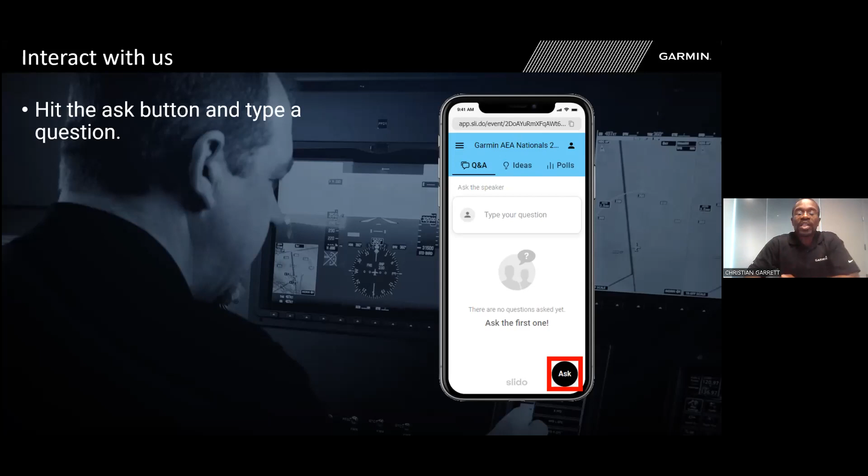So the interactive interface looks like this, and this will be a complement along with the PowerPoint that we're doing. You see, you can type your question in there on the screen, and then right there, what we see is a red lasso, more or less. Go ahead and hit ask, type in your question, and it gets submitted. You then have a secondary option of either allowing yourself to be named or to ask your question anonymously. Some questions you may not want everyone to know who you are, and that's fine. But again, if it's a question that requires follow-up, I will have to have your name in order to follow up with you.

Additionally, you see the stack that is up there in the top corner. Go ahead and press that stack, and that'll show you a number of the interactives, which are more or less the handouts that I have available for you. That's going to be a link to things like our Garmin YouTube page, which is a free way of getting information about Garmin products, as well as some free training. Also, we have links there for Fly Garmin for database questions, database management. We also have a link for the training classes that we have provided, and also some warranty information, among other things.

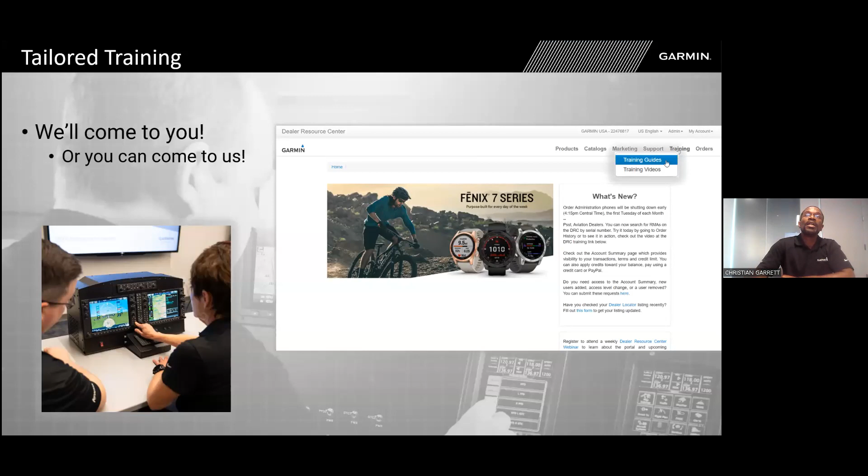And perhaps you also would like to pursue some of our interactive online training. Well, if that's you, you can go ahead and just click from our DRC the training tab at the top, click training guides, and then you'll see a page which appears like so on screen. Our example is coming from the 2022 dealer training catalog. We hit the download, and then something like so pops up.

This, of course, is our most recent dealer training catalog, and my colleague Jason is on screen actually doing maintenance and probably in the moment recording a training video. Our dealer training catalog does come out once a year, and you see right now we're covering from September 2023 until August 2024.

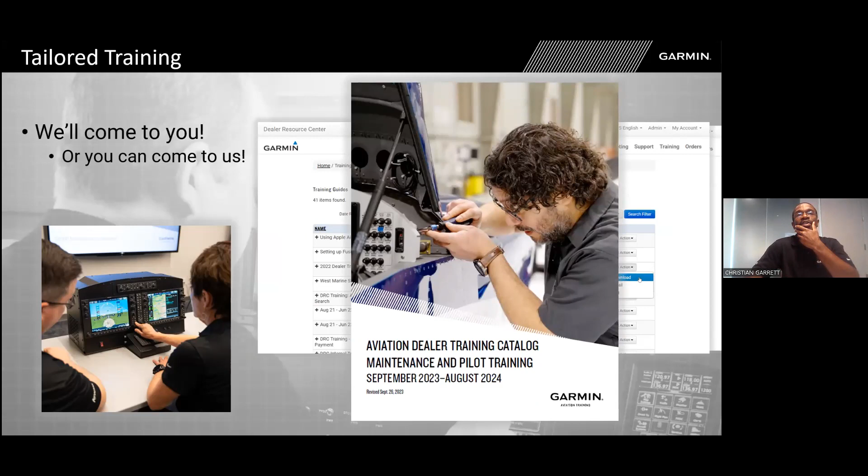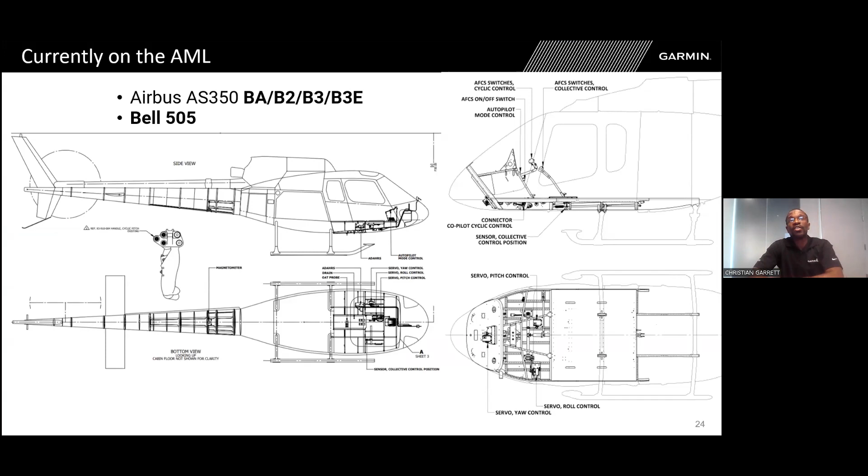And without further ado, let's march into the details of our Garmin Flight Controls 600 Hotel Part 27 interactive presentation. Currently on the AML for the GFC600H, we have the Airbus AS350, those varieties that you see on screen, and also the Bell 505. What you might not be familiar with is the acronym DHFCS. That stands for Digital Helicopter Flight Control. And this is going to be analogous to the AFCS that you're used to in the fixed wing variety.

This digital helicopter flight control is going to provide things like attitude hold, force feedback, and coupled flight director modes. It's also certified as a complement to the G500H, either the TXi or the original legacy, and also as a complement to the G1000H. What you would see on screen in the Garmin GDU is truncated over there on the far left. This is actually one full screen, but we've broken it down in our manuals to differentiate between the flight director command bars and the various HFCS annunciations that you would also see.

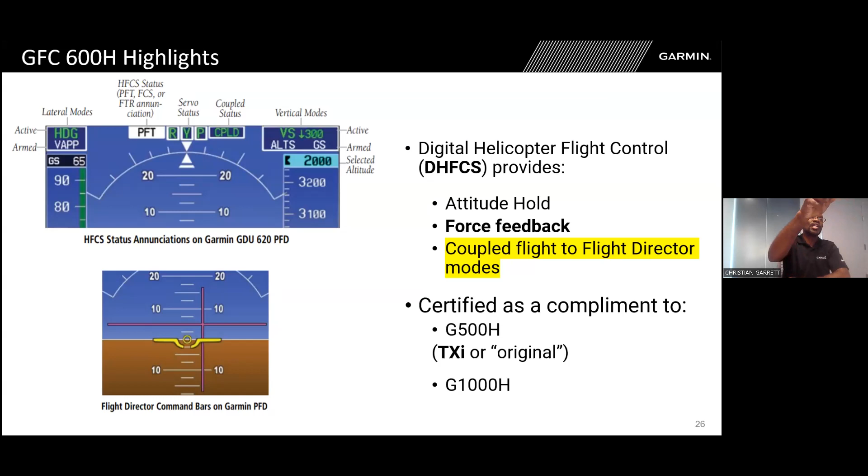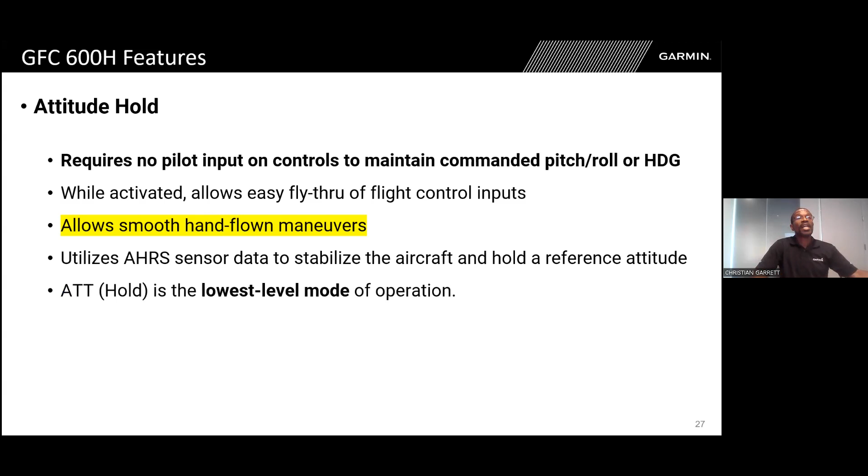Moving on to the other screen to talk a little bit more about attitude hold. This is the default base mode for the autopilot GFC600H. It requires no input from the pilot. It's an automatic default, and it's going to allow for assistance in pitch and roll, and alternatively also in heading. While activated, it's also going to provide those smooth hand-flown maneuvers. It utilizes attitude heading reference sensor data to stabilize the aircraft and hold a reference attitude.

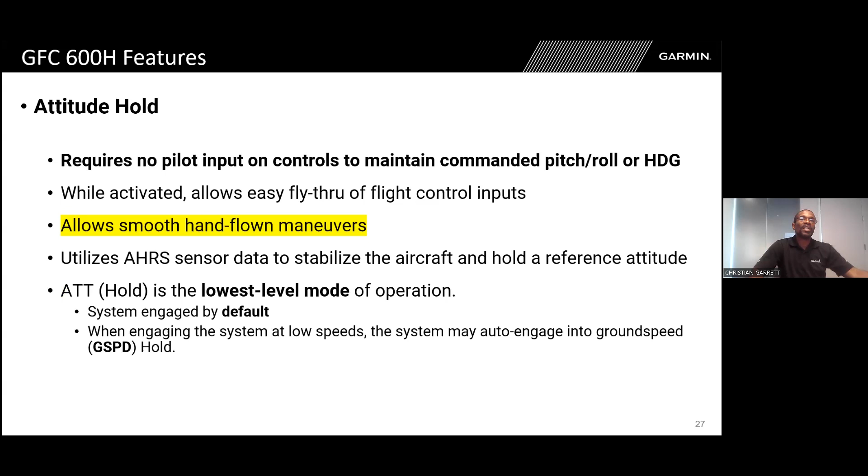It is, of course, what we call the base level mode, and above it are other modes that are not considered default, which we refer to as upper modes as far as this GFC autopilot goes. The system is engaged by default, but also depending on your speed, you may automatically be engaged into what we refer to as ground speed hold. Get ready, get ready, get ready. We have another Slido interactive.

I apologize, we do not. I don't see the laser? Oh, my apologies for that. Let me see. I believe that may be because of the Zoom interface. I'm going to go ahead and move on then.

Moving on to another subtopic, that being limit cueing, abbreviated as LMTQ. This is going to assist the pilot by giving tactile feedback. So this is the idea that if a pilot is flying, he or she would have tactile feedback in the cyclic to let him or her know that there's a danger of overflying the helicopter.

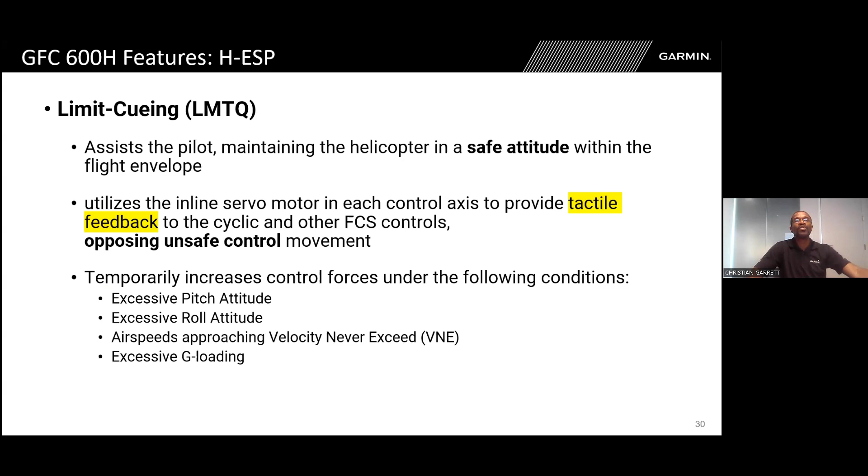This tactile feedback is going to be generated by the servos to give an opposing unsafe control response back to the pilot. This is going to be a guard against excessive pitch attitudes, excessive roll attitudes, approaching the velocity never to exceed, VNE, and also a guard against excessive G loading. It is active upon power up, but it can be disabled by holding down the flight controls disconnect switch for a period of 10 seconds.

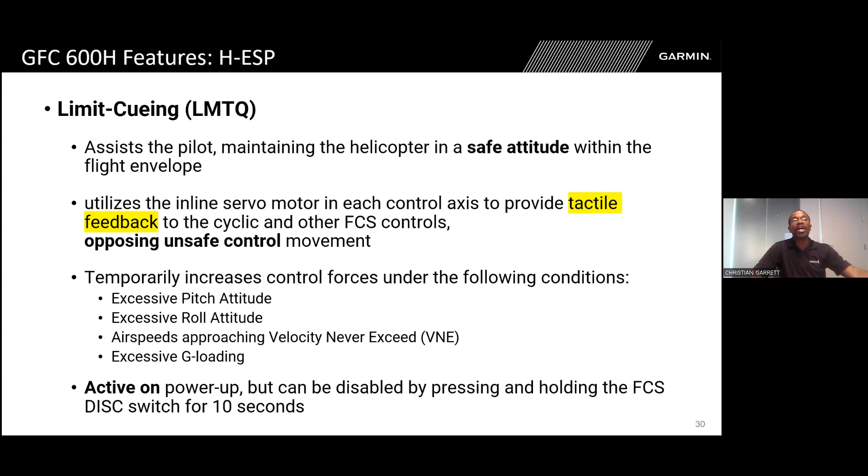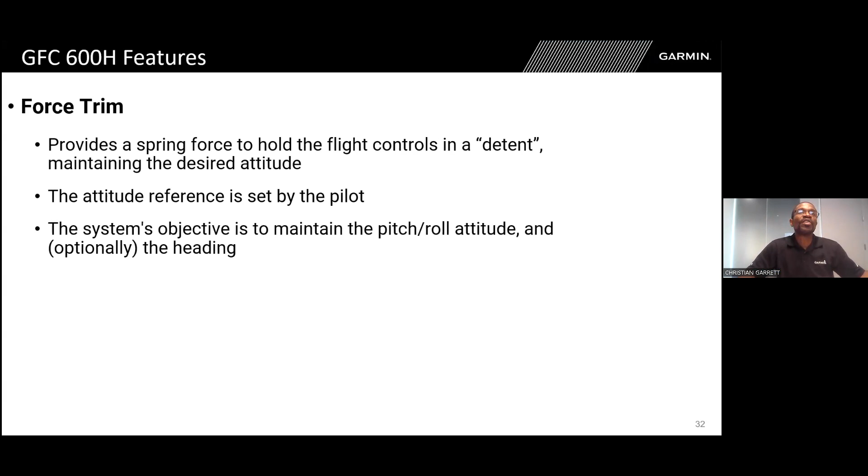Moving on now to talk about force trim. Force trim is basically a spring force detent that's going to hold those flight controls in a desired attitude. Think of this as being controlled to make sure that the helicopter doesn't bounce around needlessly. So this is a helping hand, more or less. But in the case of having a governing control to give a helping hand, it may be possible that the pilot may want to disengage just temporarily, or at least minimize the helping hand of force trim in order to do a maneuver. Can that be done, Mr. Christian?

Yes, it definitely can, with the force trim release FTR button, which is going to result in control forces being increased the farther the aircraft deviates from the reference attitude. So if you don't end up pressing down those force trim release buttons, the more you try to deviate from the detent in which force trim has placed you, you're going to get more limits on your control surfaces. But force trim release will allow you to temporarily disengage, or at least minimize, the governing control of the force trim helping hand.

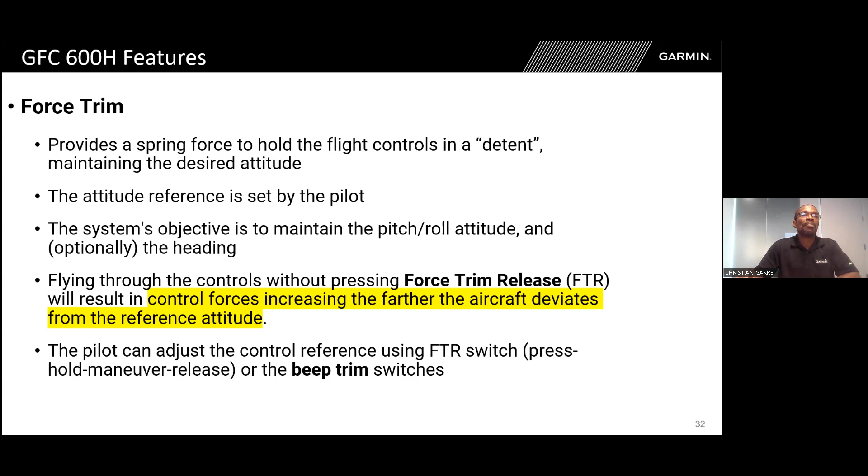Alternatively to the force trim release button, we also have buttons known as the beep trim switches, which can also provide that same temporary minimized disengagement. Moving on now to talk about speed protection. We talked about ground speed protection. Well, in addition to that, that speed protection has two varieties, that of max speed and also that of low speed, and additionally providing some low G protection available on the Bell 505 exclusively.

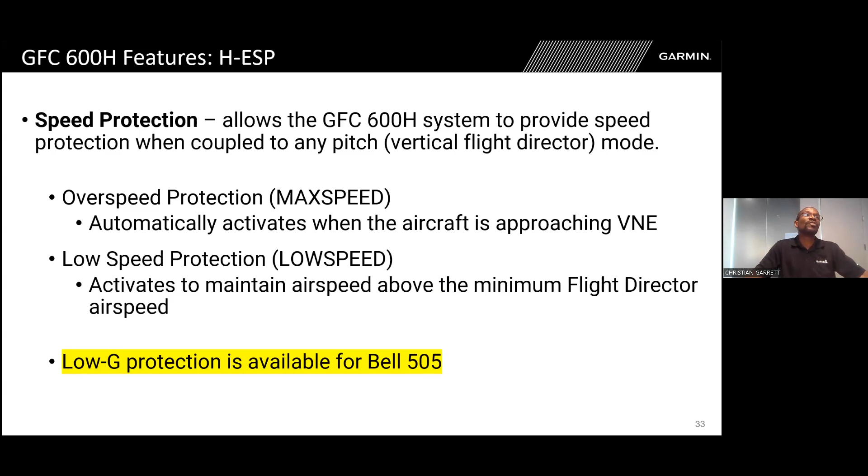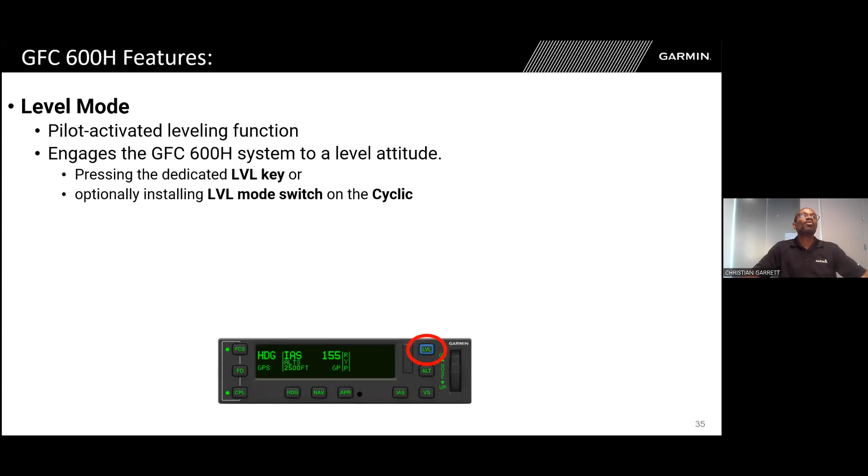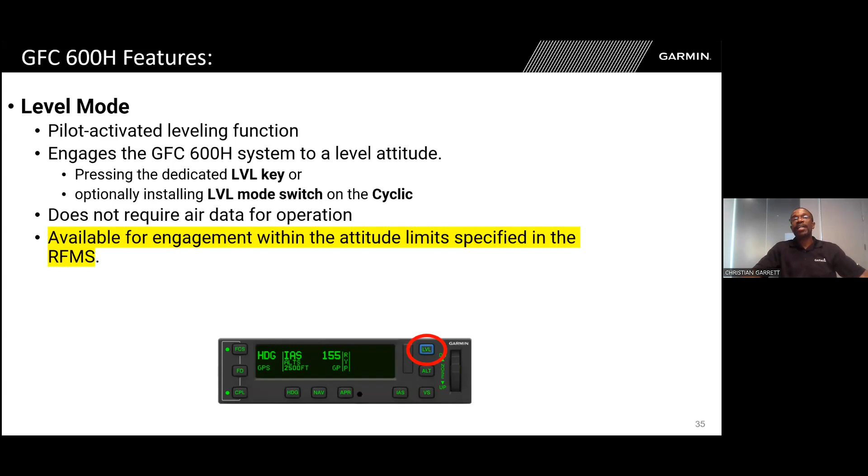Level mode. Now, this is one that I like because this is reminiscent of a disorientation recovery feature, which I encountered when I worked in the fighter jet community. Well, it would be a boon, a huge plus to have such a feature on a helicopter. And that's what we have here. So imagine being in an unrecoverable or hard to come out of flight difficulty. Pressing the level button is going to actually allow that helicopter to return to straight and level flying.

So where is that level button located? We have it lassoed there on the front of the GMC, the Garmin mode controller. As you can see, I've actually made that image a little bit bigger there at the bottom.

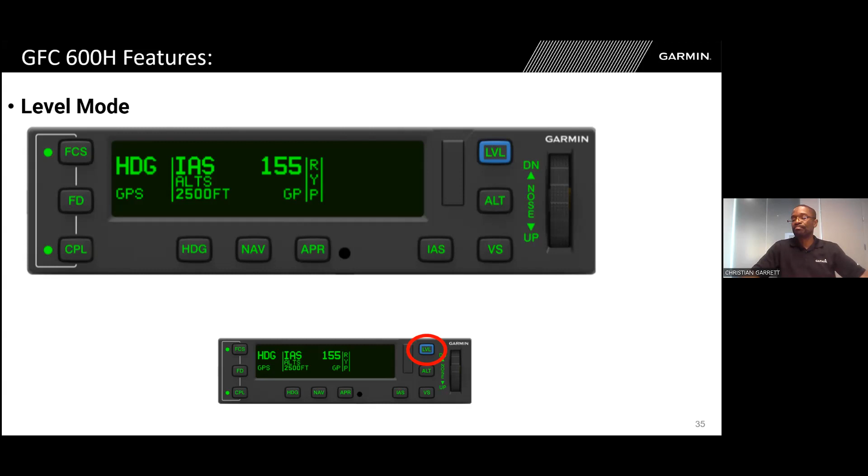But I do want to encourage you to read the RFMS, which is the Rotorcraft Flight Manual Supplement, which is complement to the AFMS, in order to get the real full understanding as to how to properly use that level mode button.

Moving on now to talk about the flight director. This is going to offer pilot selectable higher level modes. Remember, we were talking about the base level mode being attitude. Well, what are those upper modes that the autopilot has available? Well, they appear here on screen. Indicated airspeed hold, altitude capture and hold, vertical speed hold, and these beep trim vertical flight director interfacing are available

through these selections here. We also have available for you heading select and nav select, and that nav is going to provide some GPS SBAS, satellite-based augmentation system interfacing, as well as VOR, localizer, and glide slope. Important to note here that GFC600H does not support coupled en route VNAV.

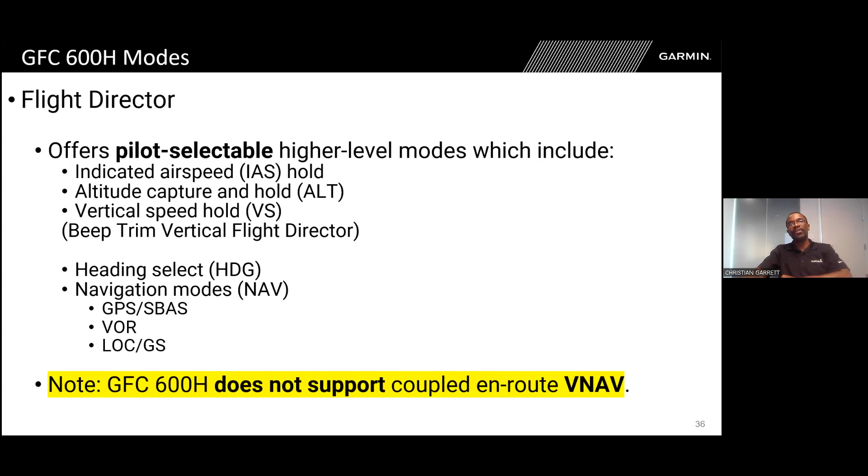Moving on, Slido interactive question, true or false? As a flight director, navigation modes GPS SBAS of the GFC600H will support coupled en route VNAV. Is this true or false? A lot of answers came up very quickly, so I'm going to go ahead and advance. False. Good job, guys. You are listening and paying attention.

Let's move on now to talk about yaw control. Now, yaw control is considered an option in our Garmin flight controls autopilots. That's true for fixed wing. That's also true for the rotorcraft community. Yaw is an option. It provides benefits in both cruise and in hover. In cruise, the yaw control provides yaw damping. And in hover, yaw axis maintains the aircraft in the proper heading. It's going to allow for very smooth hovering.

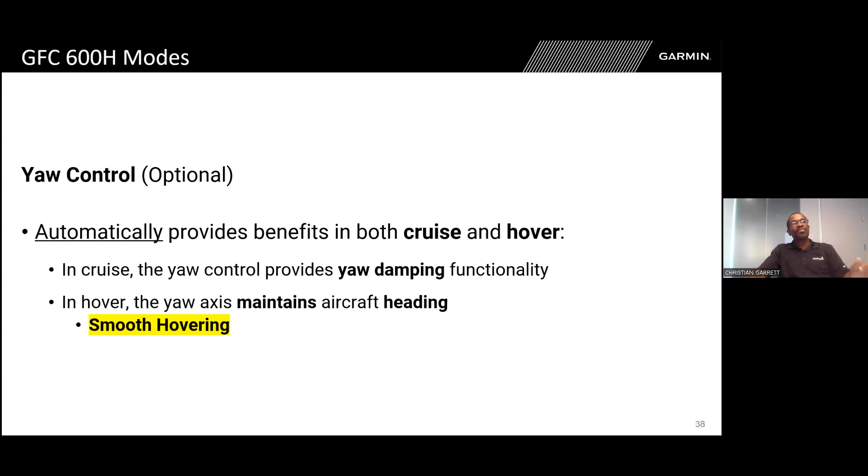So you might then ask yourself, well, we're talking a little bit there, Mr. Christian Garrett, about the relationship and the similarities between the GFC600 fixed wing and the GFC600H for rotorcraft. So what are some of the differences? Well, some of the differences I will point out as I introduce these LRUs to you. We have the GMC Garmin Mode Controller 605H seen there on screen. It's a little bit different in its appearance from the fixed wing variety.

Down there towards the very left bottom, we have the GFS Garmin Force Servo 83. It's bigger in that it's far more robust and a whole lot beefier than the servos that we see in our cable-driven flight controls for the fixed wing community. And then we see a G500 screen, the TXi variety there at the top right. And then we see a GSU75, which is going to be providing some of that external attitude, heading, and reference information.

The GFC600H is going to require one of two external AHRS interfaces, that being either the GSU75 seen there or the GRS79H. Another big difference is that there's an internal AHRS board inside the GFC600H, GMC605H, but these servos are going to require communication with both the internal AHRS in the GMC and the external AHRS from the GSU75 or the GRS79.

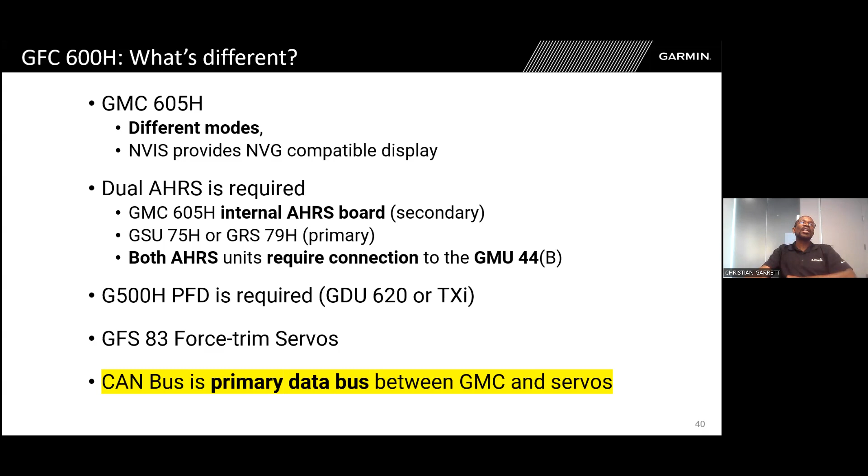And another big difference is CAN bus routing in the 600H. It's got a dual run of CAN bus running. So it's not just one simple CAN bus route or CAN bus path of high and low. It is two. So there's dual redundancy in the GFC 600H that you don't see in the fixed wing variety.

Moving on, more about the GMC 605: it provides NVIS-friendly modes and status annunciation, provides flight director computations for those upper modes above the default, which is attitude hold, and provides AFCS, automatic flight controls commands, to those servos, those beefy servos.

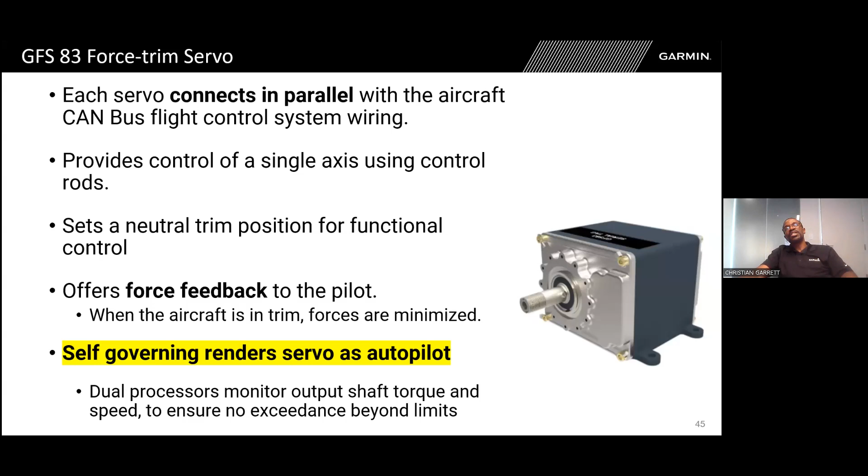We'd like to think of these servos as being self-governing, and in that respect, they themselves can be thought of as autopilots. Inside these servos, they also have a dual monitoring of their own, in that they have dual processors that are monitoring the output shaft torque, speed, and also are there to ensure that there's no exceedance beyond limits. So they're very smart. They're not just taking inputs and following commands—they're also being real smart to say, hey, I got a command to move in a certain way, but given the attitude of the helicopter, is it safe to move that way? And then they make a determination as to whether or not they will.

A little bit more about the force trim servos. Garmin force trim servos in both the fixed wing variety and the helo variety are brushless DC motors. This means that they don't have shear pins.

That's good news that in the event a pilot experiences an unresponsive or what appears to be a somewhat locked up flight control maneuver, he or she can use force to overdrive and still fly that helicopter in what they determine to be the safe, necessary flight maneuvering that need be had. In cases where servos are using shear pins, pushing over then makes the flight control do your bidding, but then your aircraft is not as responsive as it need be.

Brushless servos don't have that. We have fail passive engagement. It takes about 20 pounds of force to overcome the kickback of these servos, but once that 20 pounds is overcome, no more than 5 pounds of force is then needed to move the flight controls accordingly.

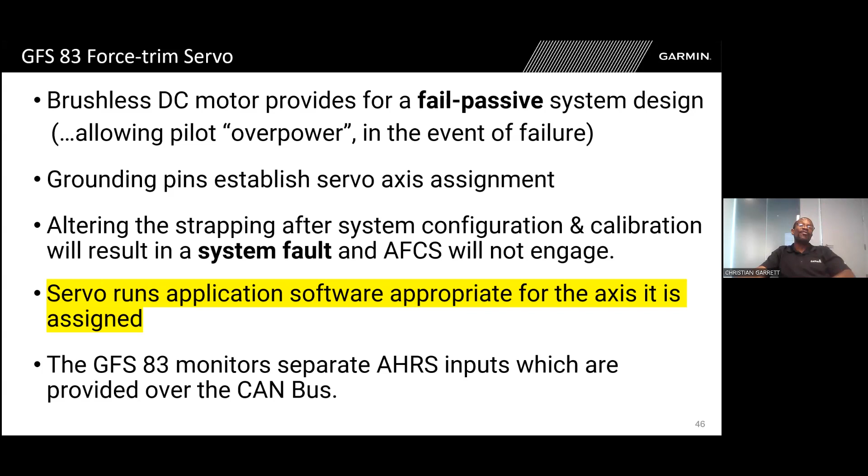Servos run application software which is going to be appropriate to their particular axis. Also important to note that you can't change the strapping once calibration and configuration have already been done. That'll end up spelling disaster for you as far as automatic flight controls goes. In fact, the automatic flight controls will not engage if you manipulate the strapping after configuration and calibration.

A little bit more about our servos. We have two different varieties: the dash 00, and we also have the dash 11. The dash 11 would be the smarter DC clutchless variety that we spoke of earlier. The simplified solenoid engagement clutch would apply only to the yaw axis servo controls.

You might ask why that is, and I believe it's because the default for the GFC600H is for pitch and roll axes to be standard. Yaw is considered an option. So if one were to have a disconnect that would be unfavorable in the yaw, you end up overpowering the yaw, and then you're just back to your standard default of having pitch and roll control. So it's a way of doing a fail-safe, I would believe. At least that's my presumption.

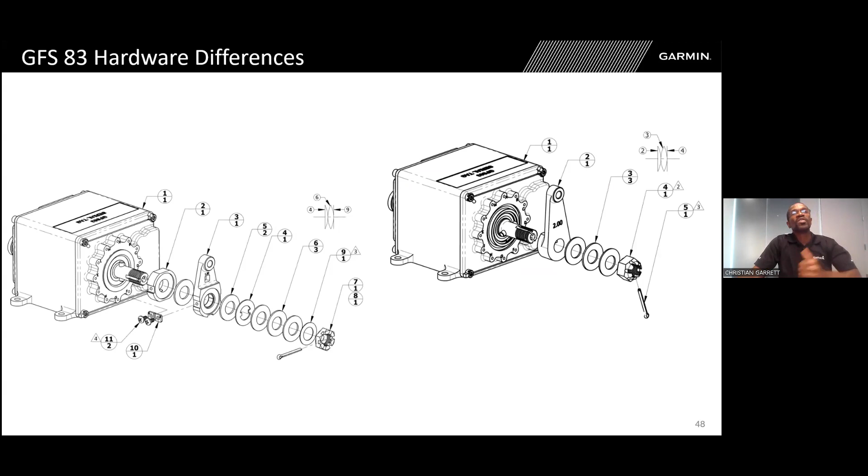The yaw servo, it's seen there on screen. It's the more simple variety. And this is, of course, one of my favorite things in the world - I love exploded views. And here, next over to the left, that would be the servo which will be applicable to the pitch and the roll axis. So you see there's more hardware that applies to that one, more washers and things of that sort.

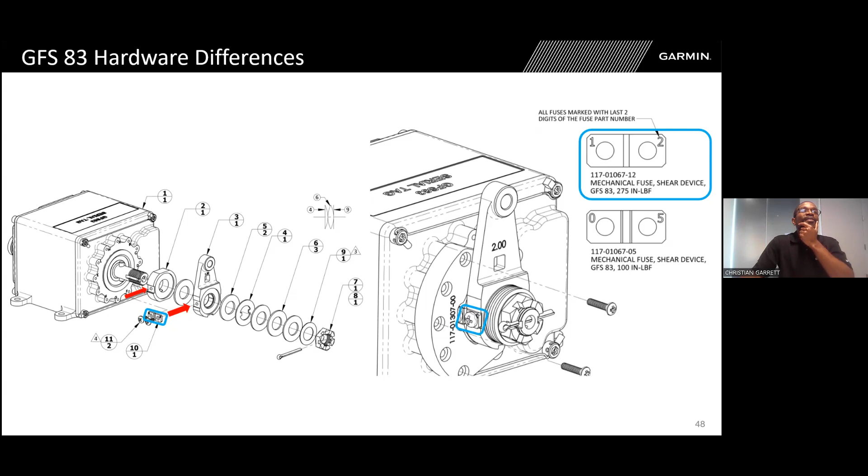So where do those shear fuses appear? Well, you see the hardware in two places there. You see over there to the left where the shear fuse is getting inserted, and I'm showing with red arrows where it actually interfaces. Over here on the right, you see the shear fuse in place with a safety device which is necessary for actually setting the null position for the servos, more or less assigning rigging.

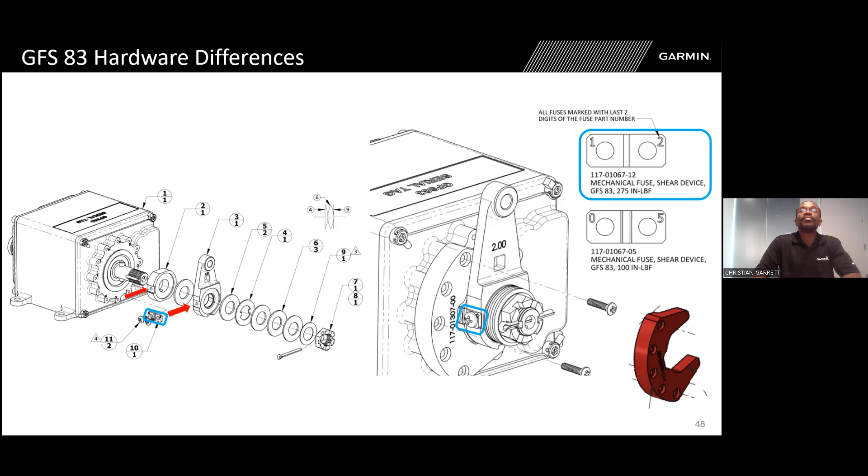We got another Slido interactive question. So choose all that apply to the Garmin Force Servo 83. They are connected in parallel on the CAN bus. There are two varieties of dash part numbers that are available. They are brushless DC motors allowing passive fail for the pilot to overpower. And grounding pins establish axis assignment, and altering this strapping after the system configuration and calibration will result in system fault and AFCS being inoperative. Choose all that apply.

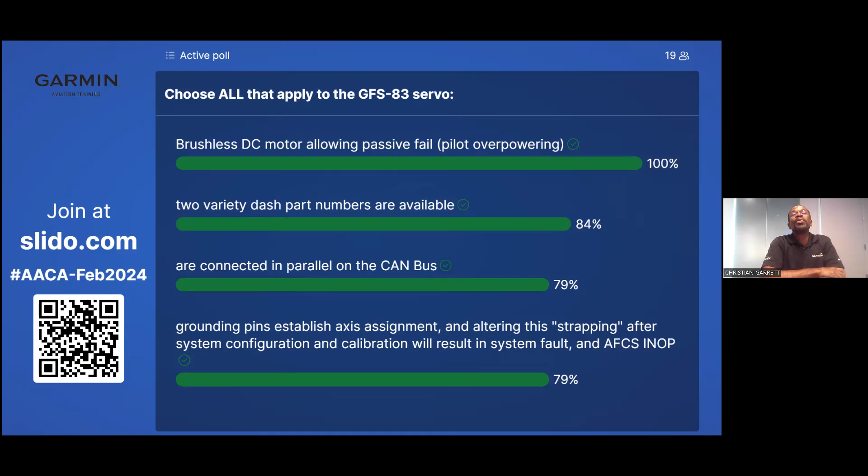Didn't mean to be tricky, but wanted to reward you if you remember some familiarity there. Yes, all of these reasons do apply to the Garmin Force servos. Good job.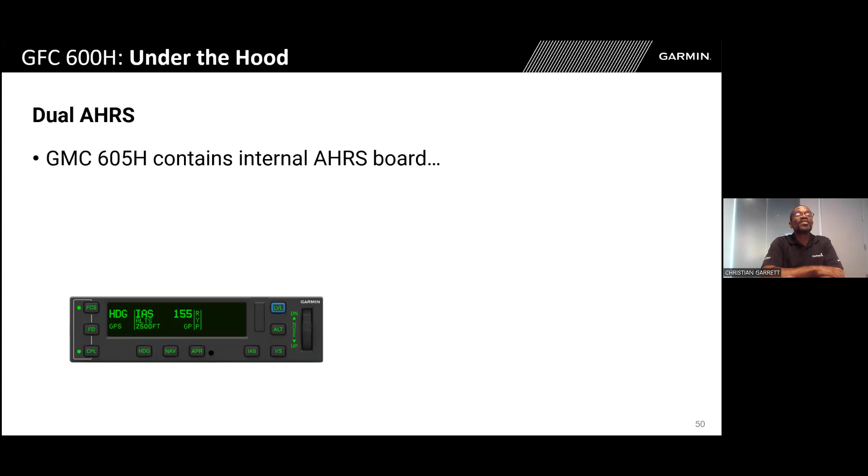A little bit more about the dual AHRS interfacing seen inside our mode controller for the GMC605H. This would be internal, and there's also the need of external AHRS interfacing from either the GSU75H or the GRS79H, required by requisite of the STC.

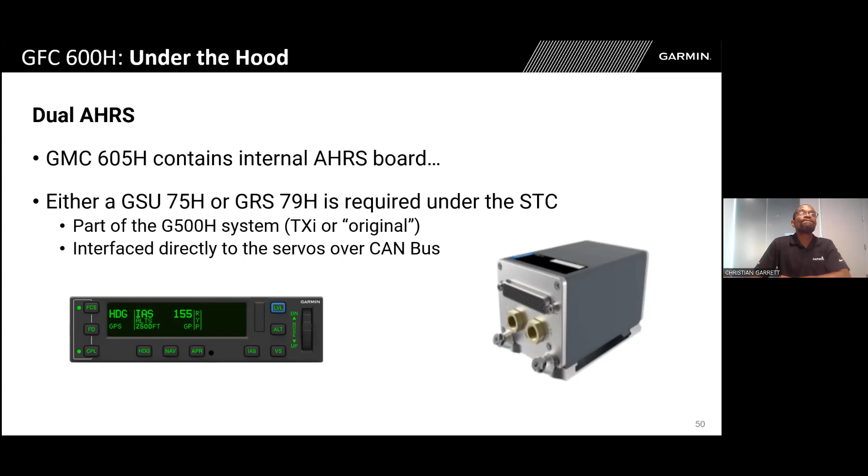My colleague, Chris Hendricks, likes to say that this marriage between the interfacing of the internal and the external is a match made in heaven. I hope he's not trying to make a pun with Valentine's Day right around the corner.

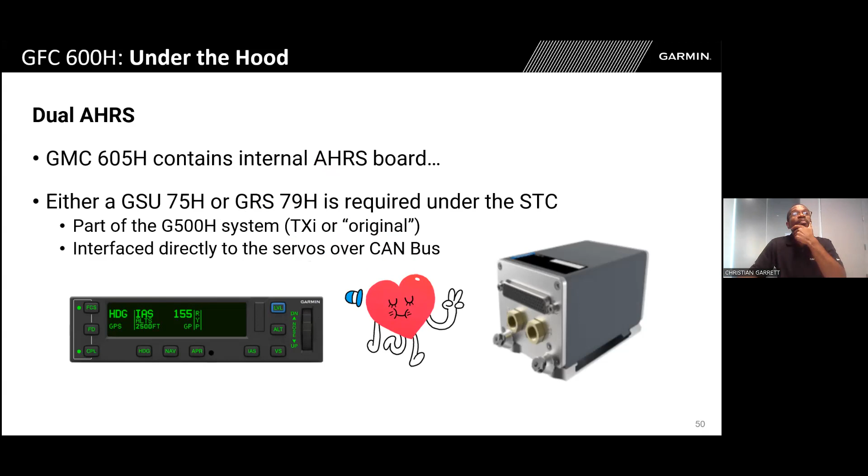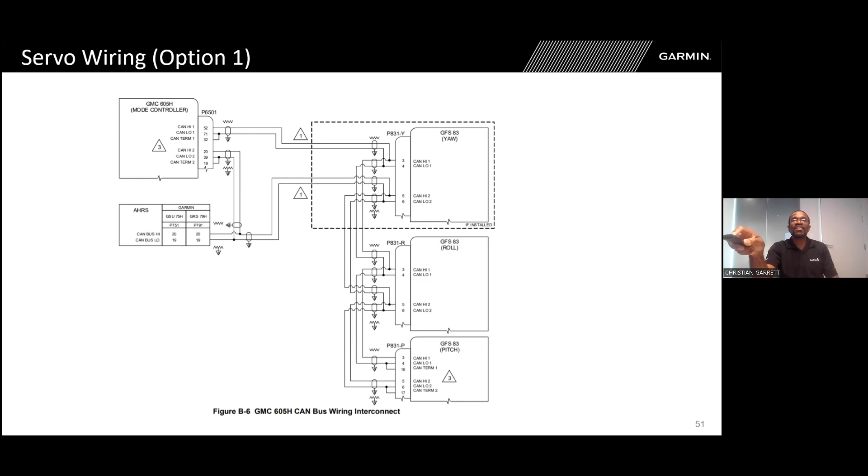Let's use the Papa 831-P for the pitch servo as our example. You see it has the CAN 1 high and low and the CAN 1 termination resistor. Beneath it on pins 5, 6, and 17, it has CAN high 2, CAN low 2, and the CAN 2 termination resistor.

If you follow the snaking of that daisy chain, you'll see that CAN 2 from the pitch interfaces into CAN 2 of the roll, then out of the roll interfaces into the yaw, and then out of the yaw, CAN 2 comes over curiously to the AHRS, either the GSU75 or the GRS79, and then there is a splice to take that to complete the loop up to the GMC605H.

Alternatively, CAN bus 1 high, low, and CAN termination resistor out of the GMC on CAN 1 snakes and daisy chains in and out of all three servos as well.

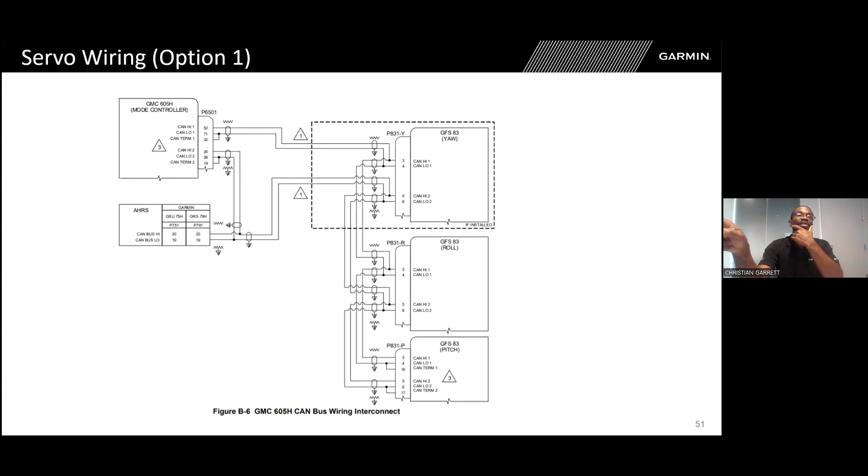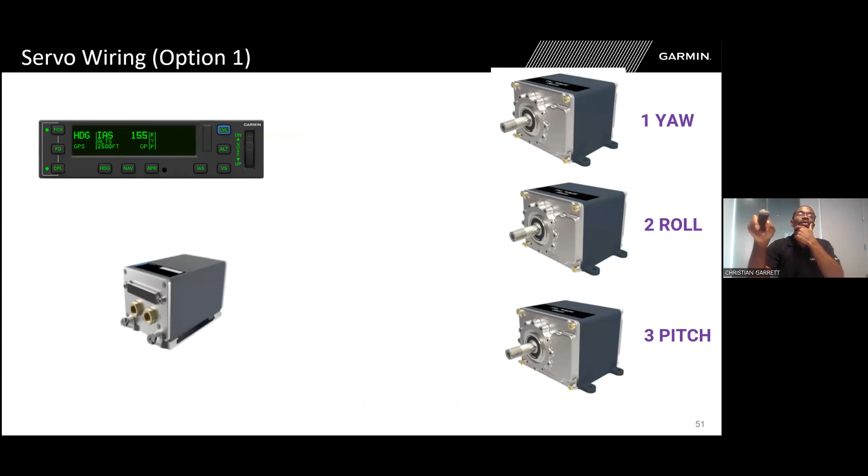So what would that look like if we take away the schematic and superimpose our pictures of those LRUs we introduced earlier? Yaw at the top, roll, pitch, a GSU75, and a GMC 605.

CAN bus 1 bus segment would look like what we see here, and CAN bus 2 segment would look like what we see here. This is what we refer to as the option 1 bus type interfacing in our STC.

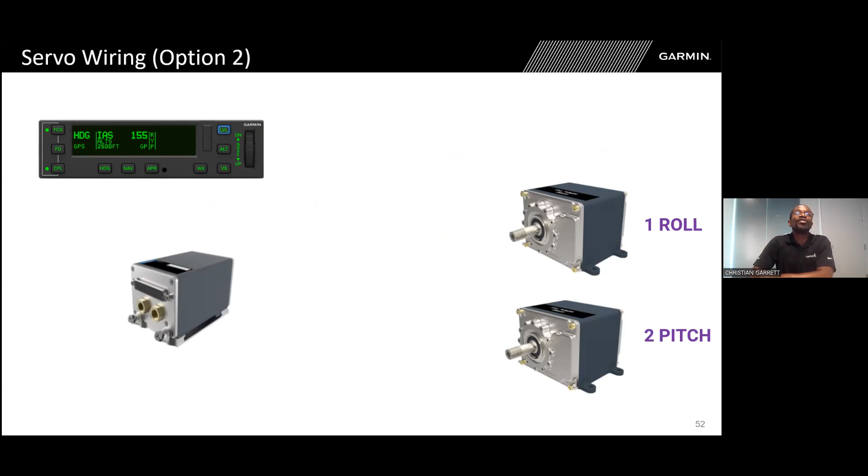What then might be option 2? Well, I'm glad you asked. It's the simplified version that does not have yaw as an option. It would appear as so, nothing different other than the fact that the yaw servo has been removed.

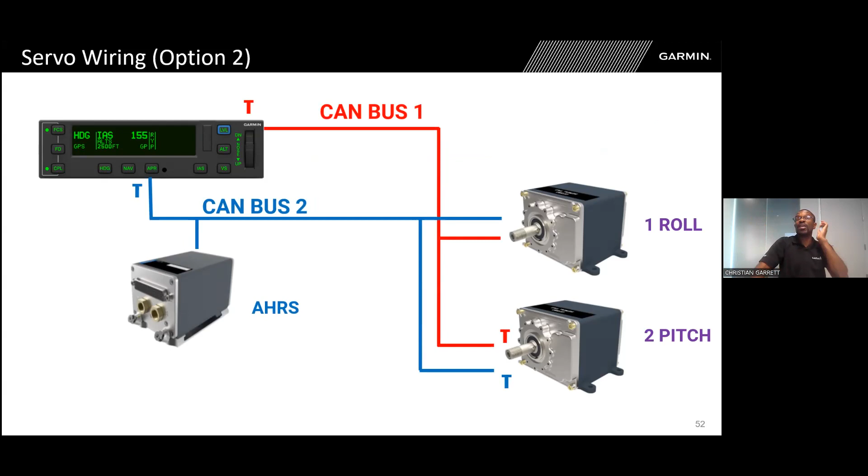Moving on, we have a real-world troubleshooting example that applies to an AS350 Bravo 2 variety. The discrepancy was that the GFC600H would pass pre-flight tests but would fail for limit queuing and for flight controls, and occasionally it would also fail in yaw, exhibiting messages on the GMC and also on the GDU 620 Legacy variety showing limit queuing message and FCS fail messages. So what symptoms did this problem have?

Well, it had four symptoms. Number one: system operates normally with yaw disconnected, with only two axes engaged. That's kind of curious and problematic. Let's hear a little bit more.

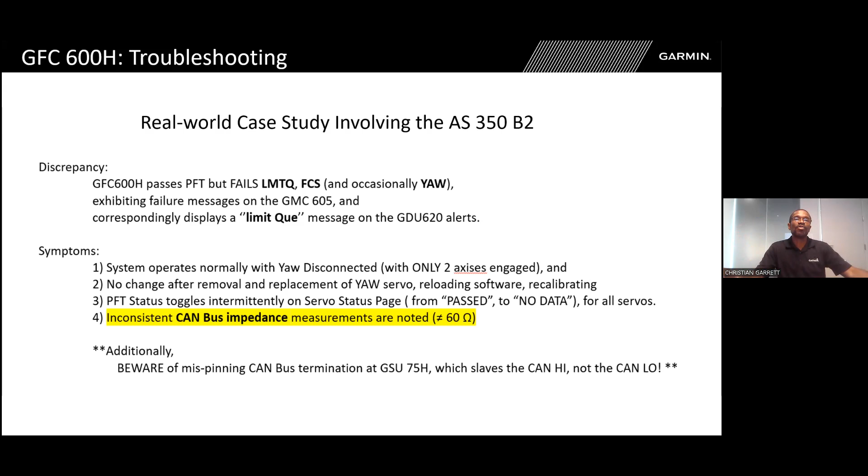So beware also the note there at the bottom, and we'll talk a little bit more about CAN bus terminations at the GFC600H as applies to this scenario. But in this case, the real world troubleshooting example, we were doing some hunting around with the multimeter, and we noticed that there was a CAN bus impedance that was not correct between pins 5 and 6 on the yaw. We only had a reading of 120 ohms. So somewhere along that CAN bus 2, we're missing a termination resistor.

We also then went hunting, and it was pretty easy, I assume, to pull out the GMC605. So they looked at the back of that and saw no CAN bus termination on CAN 2. So then that got the mind turning over ideas of where we would expect to see other CAN bus termination resistors in the system. We don't have one at the GMC, so maybe we have one at the pitch servo because the documentation says to terminate there. Well, maintainers went looking and did not see a CAN bus termination resistor on the CAN 2 line at the pitch.

So things are getting really interesting because when we looked at the yaw servo CAN 2, it showed that there was a 120 ohm resistor, but now where is that 120 ohm resistor? Well, documentation did state that in the interest of saving on time and routing CAN bus wiring through the airframe, it was possible to alternatively terminate at the GSU-75H. And therein lies the pickle of how this became a troubleshooting scenario.

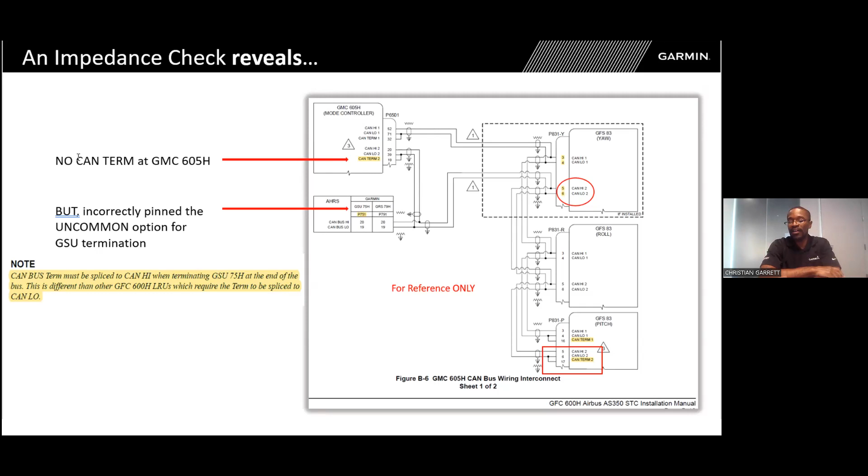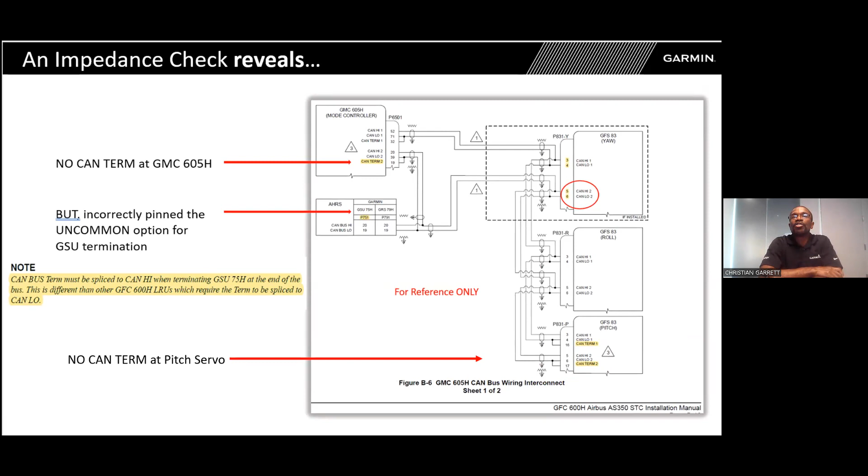So that yaw servo was reading 120 ohms for a termination that was CAN low to term resistor and not CAN high to term resistor at the GSU-75. Very interesting. This came up last summer. So the fix on that was to overcome the splicing at the GSU-75, splice in a jumper cable and then connect with the proper CAN term resistor at the pitch servo, and then voila, everything was ops check good.

True or false, Slido interactive question. If terminating the CAN bus at the GFC600H, the CAN term pin will not splice from the more common CAN low. This is true. You will not terminate from the CAN low. With the case of the GSU-75, you will splice from CAN high.

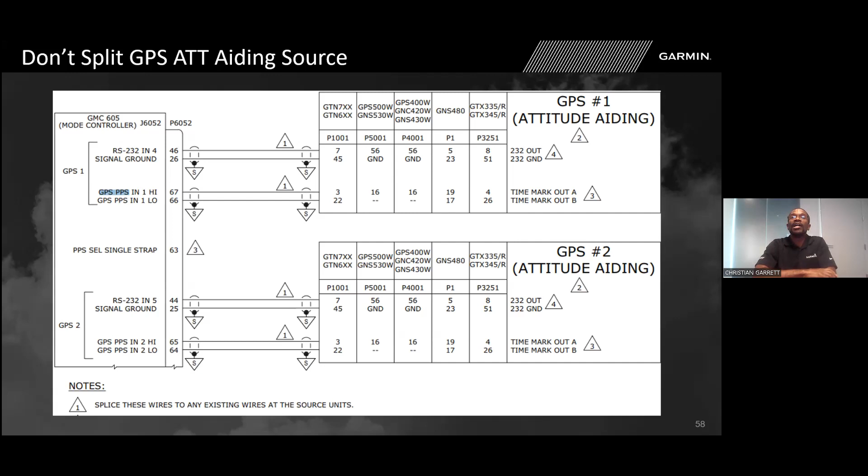Moving on to talk about other issues regarding splicing. In the case of attitude aiding information, you must splice from your navigator to the GMC605 and then have a splice also going to your GDU. In this case, we're talking about the G500, either the Legacy or the TXi. So we see there GPS number 1 navigator, attitude aiding, GPS number 2, attitude aiding, and time mark for that related information.

Going to the next slide, what does that look like? We show the splice, and notice it curiously says to a Garmin GDU. I want you guys to be on guard against splicing to different Garmin GDUs from the same source.

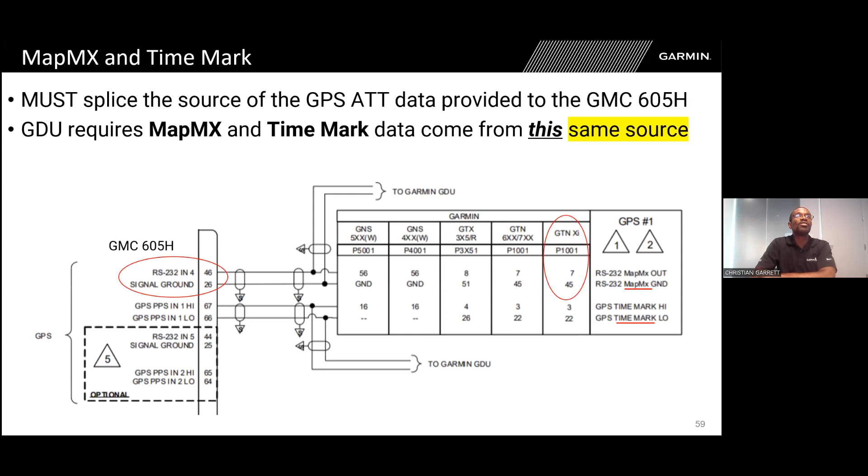That information there is intended to be a coupled package of MapMX and time mark to the same GDU. Same source, same destination, similar grouping on the destination. We have seen troubleshooting scenarios where that information was spliced, and it posed some interesting challenges for those related.

Seen differently here, we show the GDU 700 and the GFC 600, and I'm showing you how time mark information is always going to be pertaining to either a TXI or a G1000's Garmin interface EFIS. Time mark you will not see in the case of a G3X, because the way that LRU is made, GPS information is bundled within the internal circuitry and does not need outside GPS helping hand.

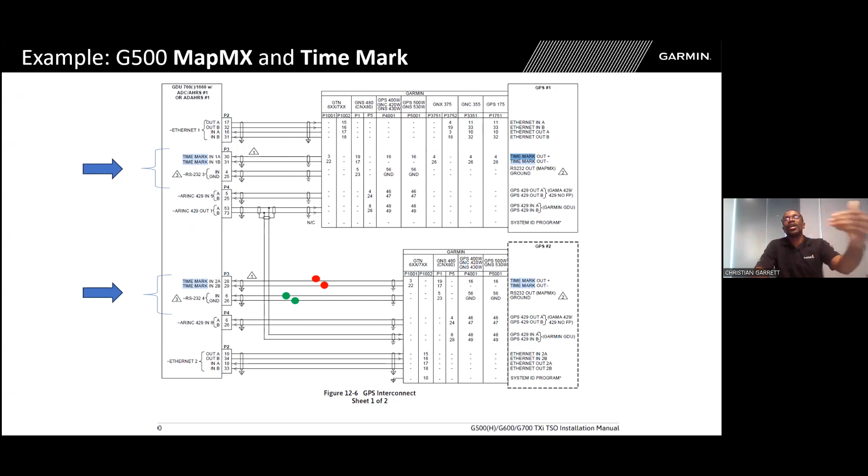But in the case of the TXI, the G500, and other G1000 systems, MapMX and time mark information has to come from a LRU other than the GDU that's reporting it. Let's go ahead and give you just a few more information here, and then I'll round out very closely to the end. Select all that apply.

GPS attitude aiding must include MapMX RS-232, time mark signals from the same source. It's okay to split the MapMX and the time mark and to send these signals to different LRUs, different GDUs, and MapMX and time mark interfacing applies to the interfacing of a GTN and either a G500 or a similar G1000 system. Give just a little bit of time for answering that question.

Going to move on. See that more than 10. Yes. The attitude aiding relates to MapMX RS-232 and time mark signals. They must come from the same source. They must be coupled together to go to the same destination. And this applies to G500, either TXI or Legacy, and other relatable G1000 systems from Garmin.

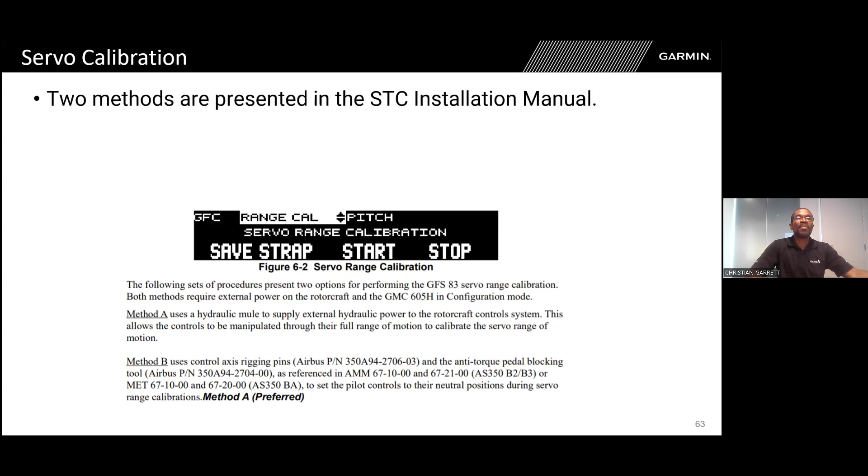In the case of the rigging, we want to go ahead and encourage that you follow method A and not method B, as method A requires a hydraulic mule, and method B requires basically what amounts to a lockout tagout in order to establish that null for your rigging pins.

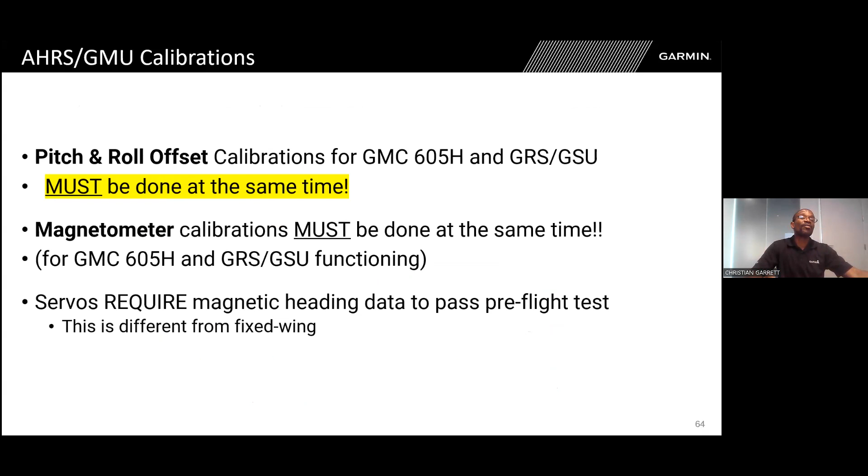We also want to go ahead and give you similar guidance with the GFC600H that you see in our fixed wing. Pitch and roll offsets calibrations must be done at the same time. Magnetometer calibration also must be done at the same time. And servos require magnetic heading data in order to pass PFT.

And also, you cannot use the ADAHRS GDUs. They are not approved. They actually have a different box interfacing on the back. We use them primarily in, say, a Daher TBM for cabin pressurization information. They are not part of the STC here in the helo community.

Also with the G1000H STC, the big tidbit of information here is make sure you're loading those software loader images in the right order. So G1000H NXi first, and then software loader image for the autopilot GFC600H. If you were going to use TXI for your helicopter, this would apply, of course, for VFR only. You've heard us say that at least 3 other times in this PowerPoint presentation.

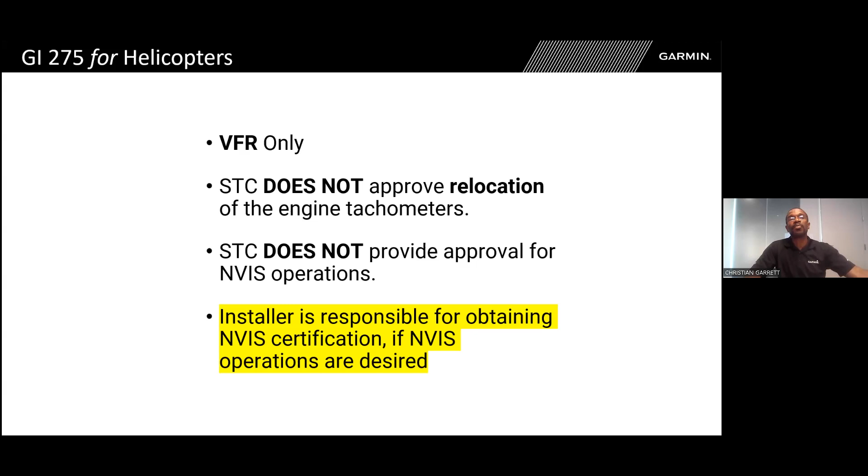The STC does not approve the relocation of the engine tachometers. The STC is not the approval authority for NVIS operations, so it's incumbent upon those installers to get that NVIS certification should they choose to make that a feature for the install.

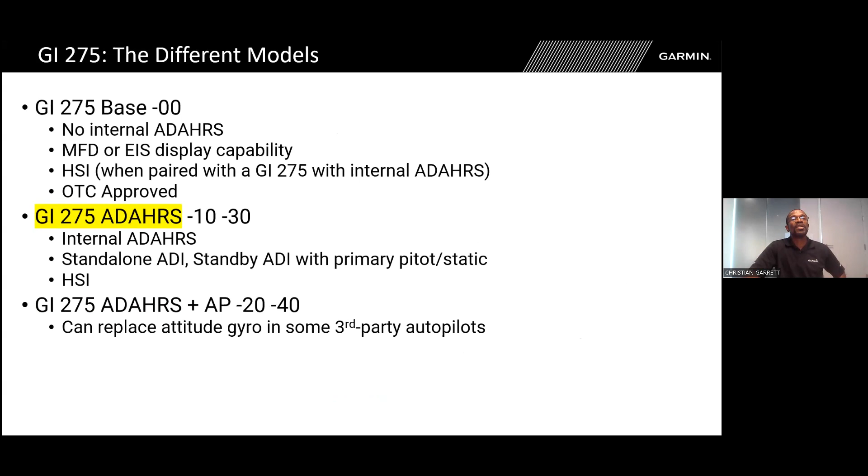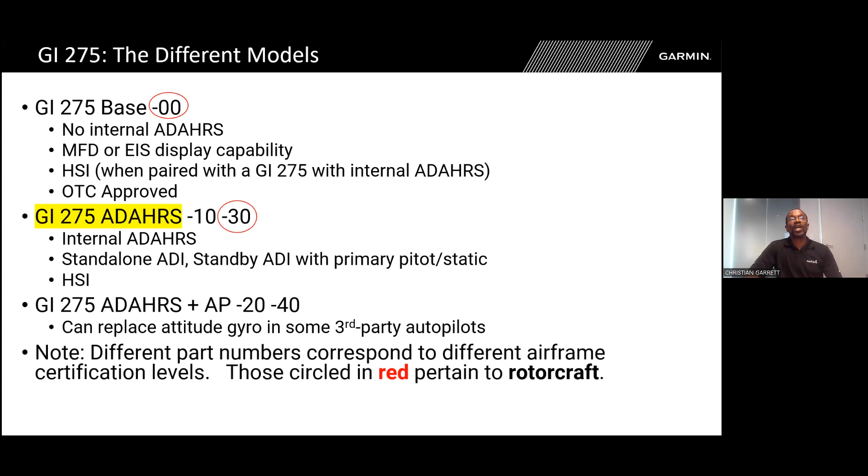So what do you get for the GI275 base model? You get the bulletized information there, MFD and EIS display capability. And in the ADAHRS, you get standalone ADI. Just giving you the rundown on what comes in Plus AP, but again, the Plus AP is not available for this autopilot interfacing. And I'm showing you in red what is approved for the rotorcraft autopilot interfacing.

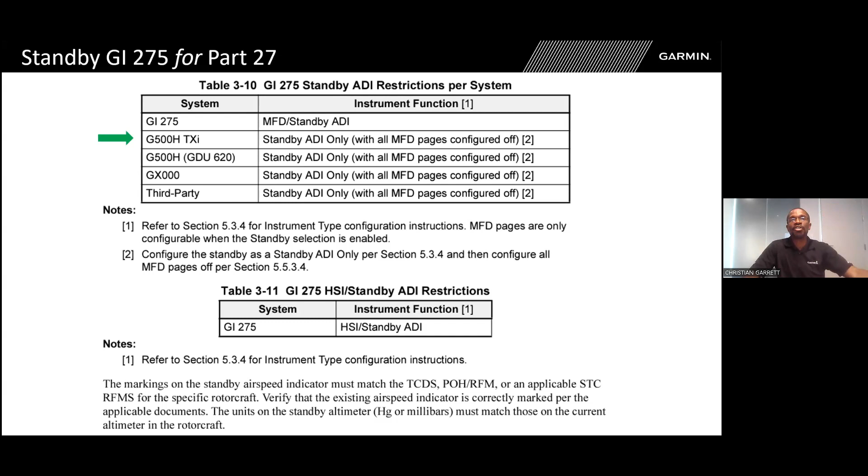Similarly, the type certificate data sheet is going to specify in the note there at the bottom that the standby airspeed indicator must have markings that match what is seen in the type certificate, the POH, and the RFM.